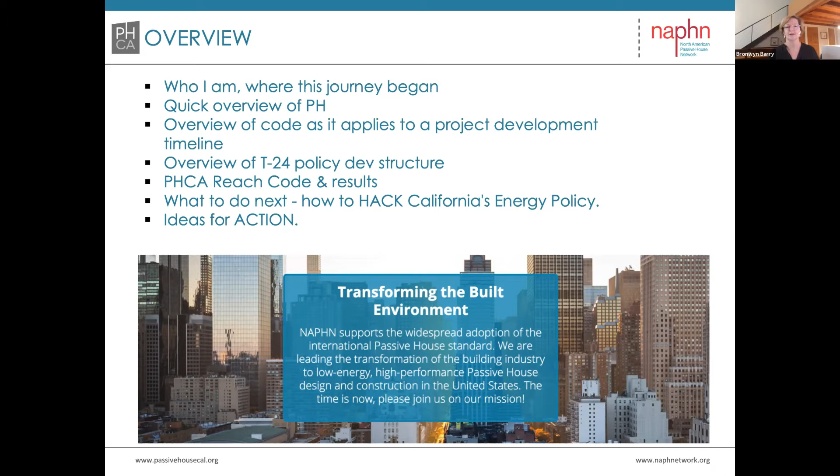A little bit of background here. Really, I came to all of this work as a practitioner. I am an architect, based in San Francisco, and for my entire career I've really been chasing this idea of how to build a reliably comfortable building for my clients. This through various explorations.

I went down a bunch of different rabbit holes in the early 90s looking for the green building pathway, and we tried all sorts of things, looking at straw bale and cob and denim insulation. This was in an era where we really didn't know what a green building was, and we were all collectively trying to define that idea. And this was where I stumbled across Passivhaus.

by going to a presentation in Berkeley by a guy named Nabih Tahan, who had recently returned from living in Austria and renovated his bungalow in Berkeley using this Passivhaus performance model. It really was a big aha, eureka moment for me, because it gave not only the integrated methodology to deliver this reliable comfort, but it actually also had the tools. And as a pretty practical practitioner, I always want tools. So that really struck a chord for me.

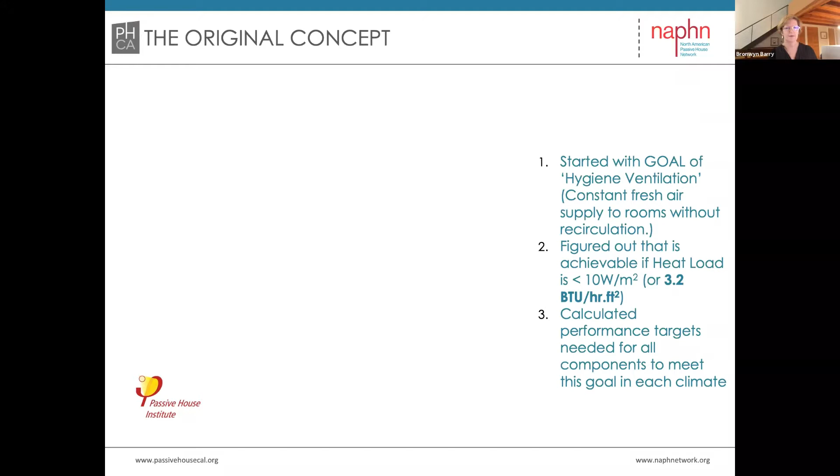So the original concept is super basic, and in our current COVID constrained world it makes so much more sense. It really was based on the idea of how to deliver 100% fresh air into a building without having to recirculate, and then just supply a very little bit of heating and cooling.

And really, that was the main experiment. It was founded by two physicists, which sounds like an idea that physicists would come up with. And then, based on the goal of supplying 100% fresh air ventilation to a building, they looked at what the target had to be, how little heating and cooling would be required to enable that fresh air supply to be possible.

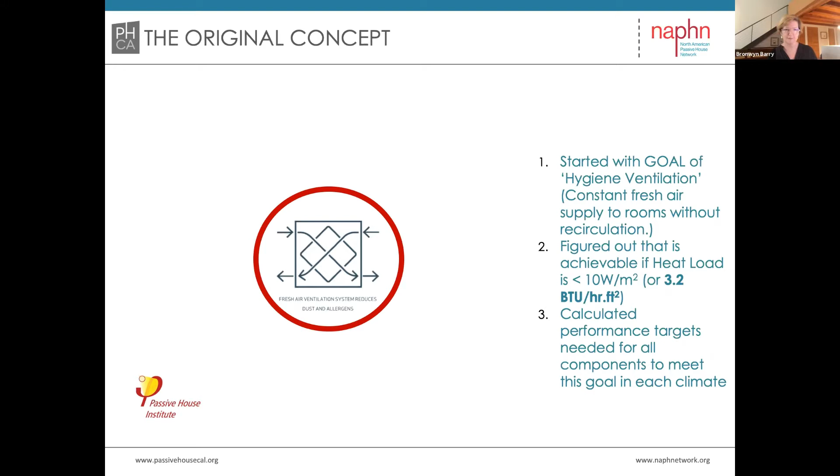And then they literally designed the rest of the building elements around that goal and figured out how to actually achieve that primary target.

So, the baseline really of Passivhaus was they figured out that if you created a building envelope that only needed 3.2 BTUs per hour per square foot as the primary heating load, then you could actually constantly supply it with fresh air.

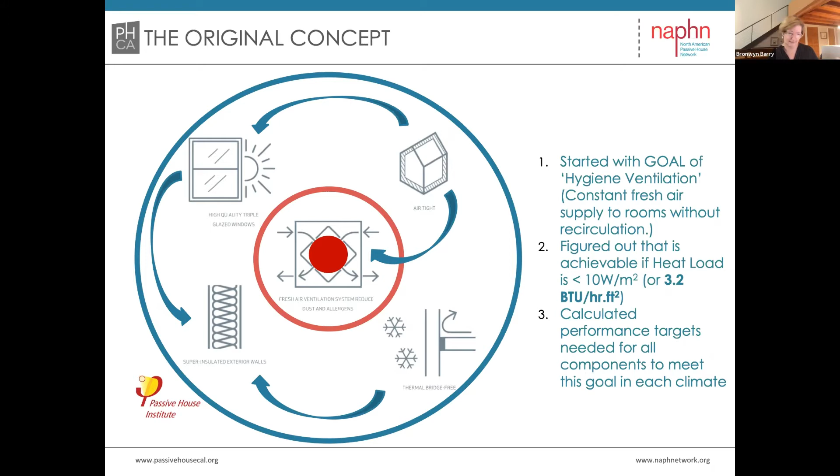And as I say, in the COVID constrained context, this suddenly makes a whole lot of sense, because if you've been reading any of the science coming out about how to minimize COVID spread inside buildings, all the guidance is saying 100% fresh air supply, which is incidentally where this all started.

So, based on that thought experiment and developing the physics around it, the first Passivhaus was built in a place called Kranichstein in Germany. It's just south of Frankfurt, for any of you who've ever been to Germany.

And this is it. It was a fourplex, 4 townhouses. And one of them is owned by the founder of the Passivhaus Institute. He lives in the end one on the far left there.

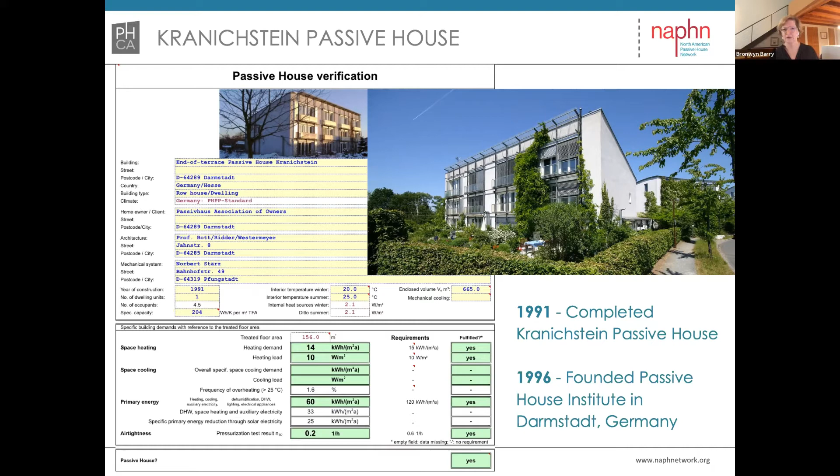And he then founded an institute and developed an energy model that can be used by anybody, including myself, architects, to achieve these targets in your local climate and with whatever building you care to input into the software.

And incidentally, I developed a tool with some smart physicists here in California a while ago that looked at how do you do sensitivity analysis to your energy model to really optimize the targets that you are trying to meet for all of your components of your building. So your windows, your exterior wall assemblies, your roof, your mechanical system, how beneficial air tightness is in your climate, and then a couple of other sort of very specific window

surface area, etc. And I ran that original Kranichstein building's Passivhaus model through this sensitivity analysis package, and lo and behold, found that every single component in that building was optimized to that 10 watts per meter squared, or 3.2 BTU per hour per square foot heat load target. So clearly, very meticulously developed and designed.

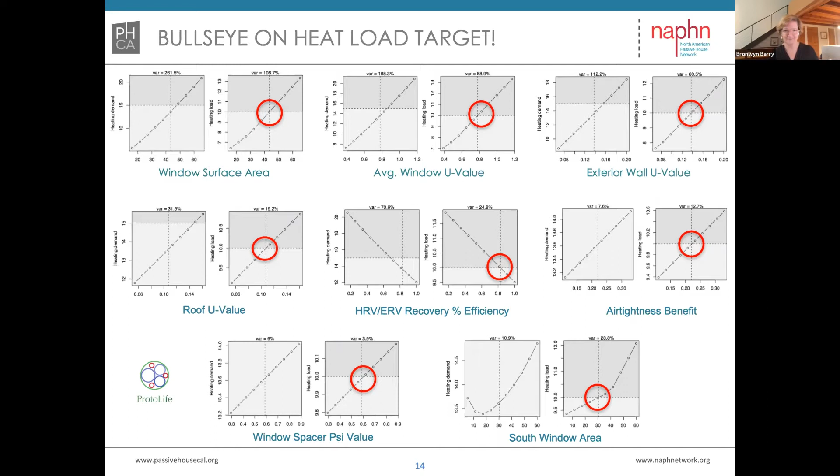So, once with the big picture in mind of what Passivhaus is all about, which was originally the goal to deliver what's commonly now known as hygiene ventilation, which is just basically 100% outside air supply to your building, and then being able to heat and cool that minimally without using too much energy.

These were then extrapolated to become the Passivhaus standard, so you could certify your building, and the primary certification metrics are these.

The peak heat load number of 10 watts per meter squared, which is where that originated. Then they set a heating or cooling demand cutoff point, which helps lower the amount of renewable energy required to heat and cool a building.

There's an air tightness number, which is really important for not only maintaining the efficiency of your ventilation system, but also has some real durability benefits with moisture transfer through walls, and really just containing your indoor air quality within the building envelope, so you can effectively filter and exchange air without having random air leaks within your envelope.

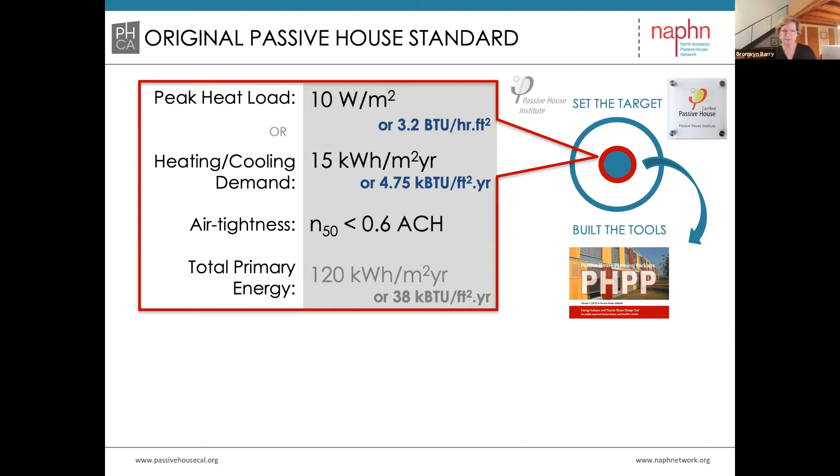And that has all been supported by, as I mentioned earlier, providing a tool that enables anybody to input their building into this model, and then change and adjust the design to ensure that you would meet these certification targets. So it's effectively a really great design tool, which is what I've really come to appreciate about it.

And then they also developed some trainings around the software and the protocols and methodologies to actually achieve these targets. So it's a really well structured process where you get trained, you get the tools, and then you know how to meet the targets clearly. So actually implementing something that could be quite challenging has a support structure for implementation.

And then, as with anything good, it evolves over time. The original standard, this total primary energy target, in 2015 was actually completely overhauled, because our world has really changed quite dramatically since the early 90s, when this standard was first developed, and carbon emissions and our climate change challenge has become one of the biggest imperatives of our time.

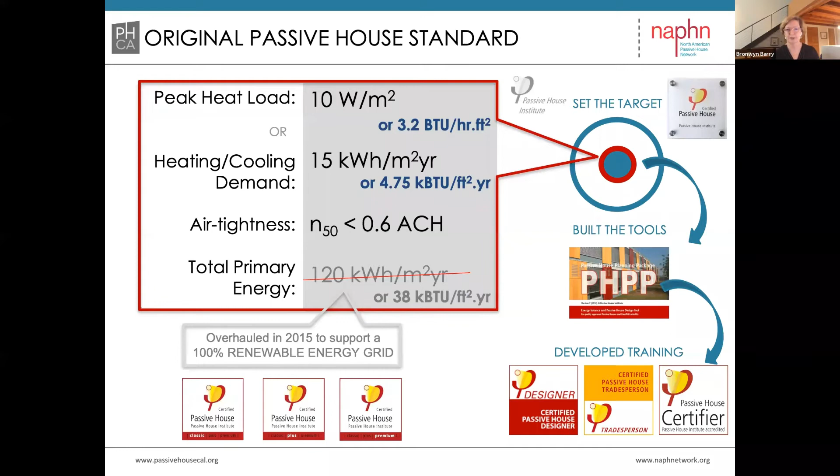And as I say, the 3 classes are really a function of reduced demand over increased generation, so they're a sliding scale as opposed to a fixed target. The classic is the basic passive house.

That can have some renewable, but it needs a specific amount of renewable to get to the second tier class, which is the plus energy. And the third tier class is the premium energy, which is maximized demand reduction and maximized renewable energy generation.

And of course, the plus is sort of an improved variant of the premium and the classic. But needless to say, the basic premise of Passivhaus remains, which is drive demand down to the lowest possible point to make it economically feasible, then optimize the amount of renewable energy that is supplied, and reduce any non-renewable energy demand.

So it doesn't say you can't use a fossil fuel, but it heavily disincentivizes them, and basically penalizes the fossil fuel supply grid. And then it gives you some options for green roofs and shaded roofs.

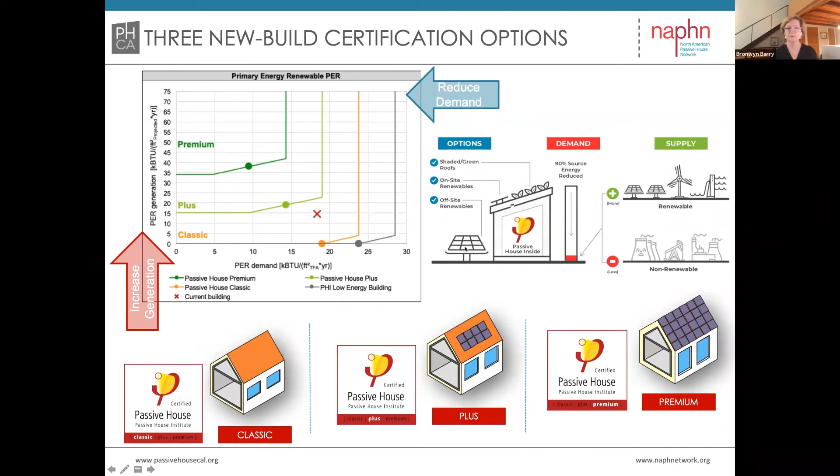So it also has a framework for retrofits, because as everybody who works in the building industry knows, most of the carbon emissions from buildings are coming from what's already existent.

Being able to create a framework that allows for existing buildings to also be upgraded and meet these same rigorous energy targets is important. The metrics are slightly more relaxed for retrofits, because everybody understands that retrofits are a lot more challenging.

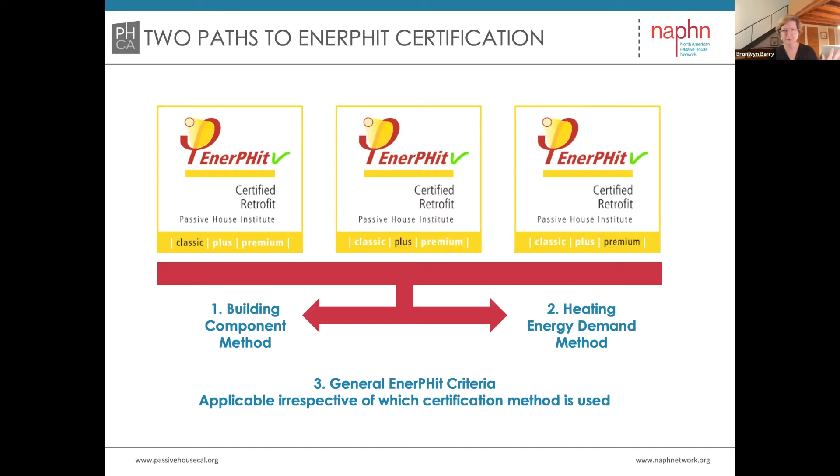You're dealing with a lot more constraints that you don't have so much with new construction. The retrofit process can also be done in a phased way, so the economics aren't as challenging, because sometimes you just don't have all the money up front. Being able to do them in a mapped out version with a plan, knowing when you can afford to do each upgrade and still meet the end goal, is important. There's a couple of different methods, pathways to do that.

Passivhaus is also a global standard. It applies to all the different climate zones across the globe. In California, Passive House California has had all 16 of our different climate zones modeled with the climate data set for all 16 climate zones here in California.

Essentially, you simply adjust the design of your building to meet the targets specific for your climate zone. So obviously, a colder climate zone like Tahoe, you would need slightly thicker walls, a little bit more insulation, and perhaps definitely triple pane windows.

Whereas in San Diego, you might actually not need any insulation in your foundation, because you want the cooling benefit of being ground coupled, and you definitely don't need triple pane windows in San Diego. So as I say, it's design adjustable to your local climate zone.

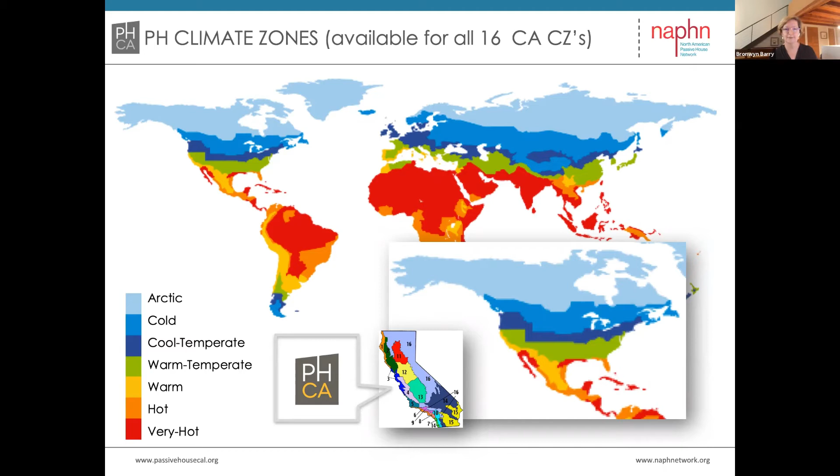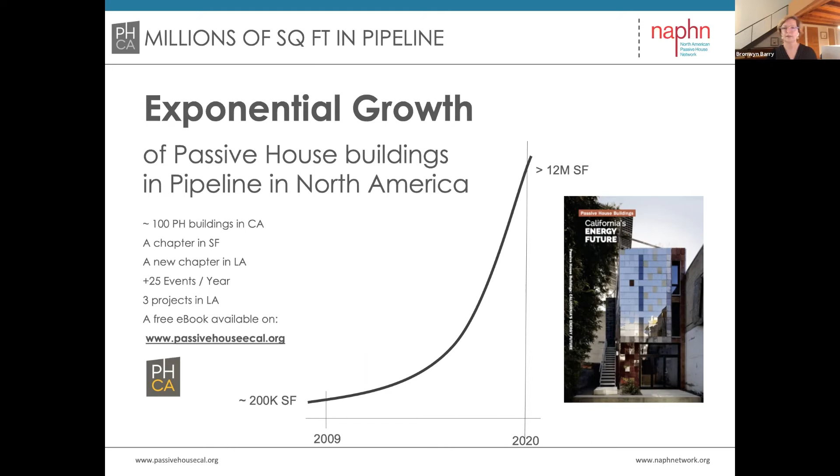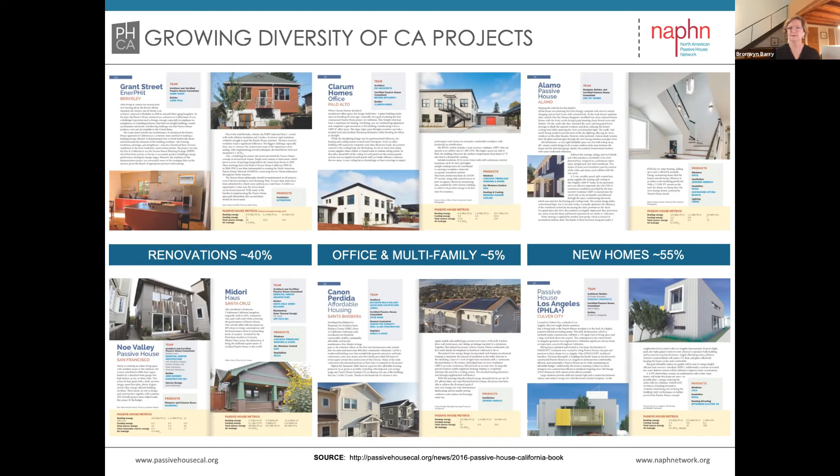But we've actually found that California has slowed down a little bit compared to the uptake in other regions. This is where I'm showing you some projects that we also have on our database all around California. For the most part, the uptake has been in single-family residential buildings.

This is also the space that I've been working in. As an organization, as Passive House California, we sat down and looked at why California has been slower to pick up on Passivhaus than many other regions around not only North America, but definitely the globe, because California has historically been leaders and innovators, and our climate policy has also historically been very well regarded.

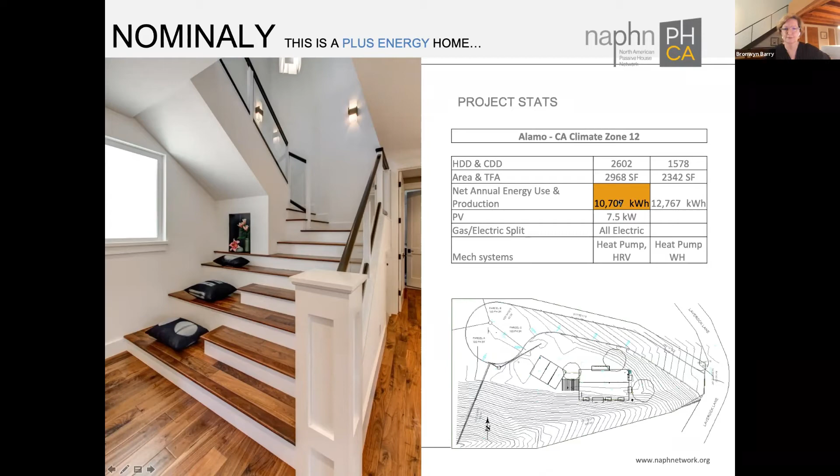But when I started to look at what was required by code - this was the 2016 code - the code required my roof to be an R38. My Passive House model, I built it at R46. It could have been just a little bit less, but we filled up the entire roof cavity, and effectively the R value is 46. My walls code at the time required R19, and we built them at R28.

My windows are much better than the code requirement, and we insulated our slab, whereas the code does not require that slabs be insulated. The code also assumes an air tightness of 3 air changes per hour, but does not require that it be tested. That is a very wishful thinking requirement, as far as I'm concerned.

We tested the air tightness of this building. It came in at 0.3 air changes per hour. Just to put that in context, the Passive House standard requires that your building meet 0.6 air changes per hour. An average building tested in California ranges between about 12 air changes per hour, and some get down to 3 or 4, but generally, 0.3 is considered incredibly air sealed with a tightly built envelope.

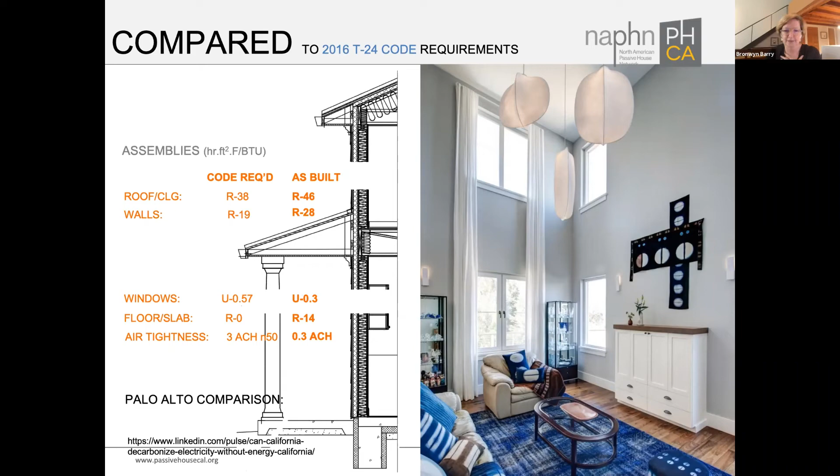And of course, we included a mechanical ventilation system with heat recovery. With this 7.5 kilowatt array on the south facing roof, and this owner also has an electric vehicle, the house used just under 10,000 kilowatt hours per year. They used some for the car, and we had a net positive surplus after the PV production. For those who understand energy use intensity, the EUI for this building is about 9.5, which is within the Architecture 2030 target range for a single family home.

But what I found is that the idea of this net positive, or even net zero house, became really problematic once we started to look at this building.

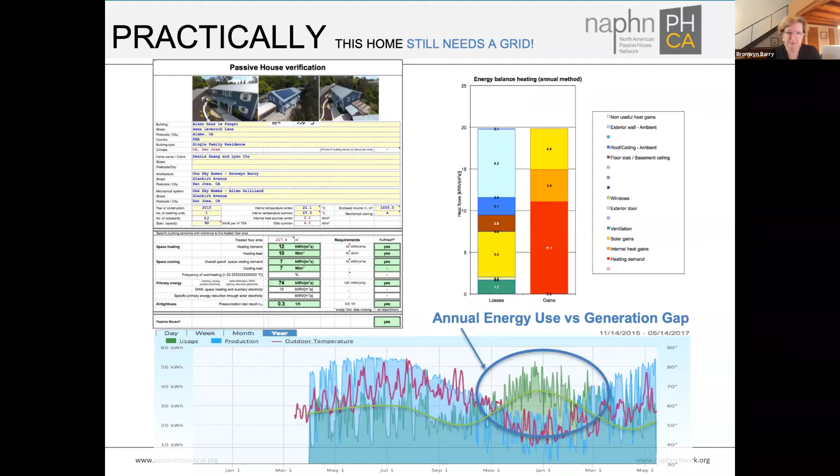Just to demonstrate, this is another house that I built more recently and did the same monitoring, because once you start monitoring your projects, you really get to know exactly how effective your strategies and your energy model are working. This house is an incredibly efficient home.

The green line is the total energy consumption, including the electric vehicle. The owners have one electric vehicle they charge off of this solar array, on the backside of this house. This is their solar production.

You can see again in the winter, and interestingly, there's a small dip because of our summer fog in the solar production that happens in the July-August months, where it doesn't quite supply all the demand even.

Through PG&E I found that all the homes in this neighborhood were built to the exact same model with slight variations, essentially all the sort of 2-bed, 1-bath, 1-garage bungalow cottage. I aggregated all of those and showed this is the average energy consumption for a similar home in the same zip code.

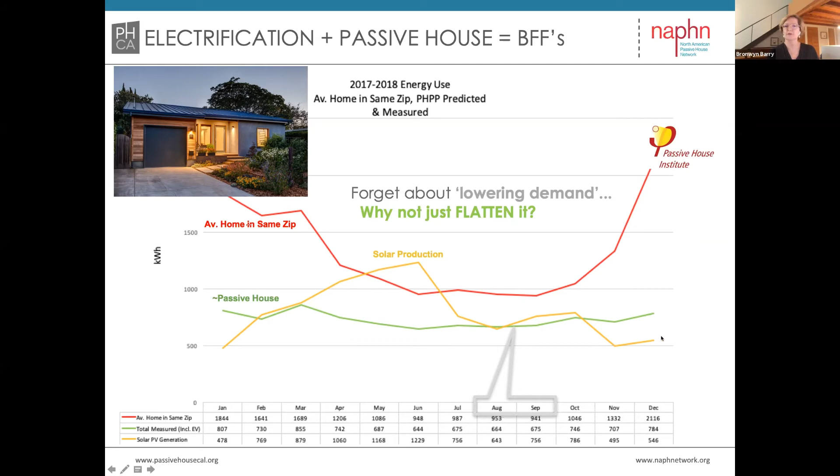Back again to where I was starting to see big disconnects between what I was trying to do with Passivhaus and what our Title-24 energy model was pushing us to do, which started to become really apparent. So this project, this was my Passivhaus metrics and model, and these were the results that my energy model told me I was achieving.

Then my Title-24 energy model — these were results it was very difficult to actually put onto this graph in a meaningful way, because what Title-24 does is it doesn't give you absolute targets for your building. It compares your building to a baseline building, and then you get told my building was 57.5% better than this mythical baseline building, which incidentally is not anywhere close to what my design looks like.

And that was for space heating. I was 23.9% better for space cooling. I had some IAQ ventilation numbers that it said I was 0% on.

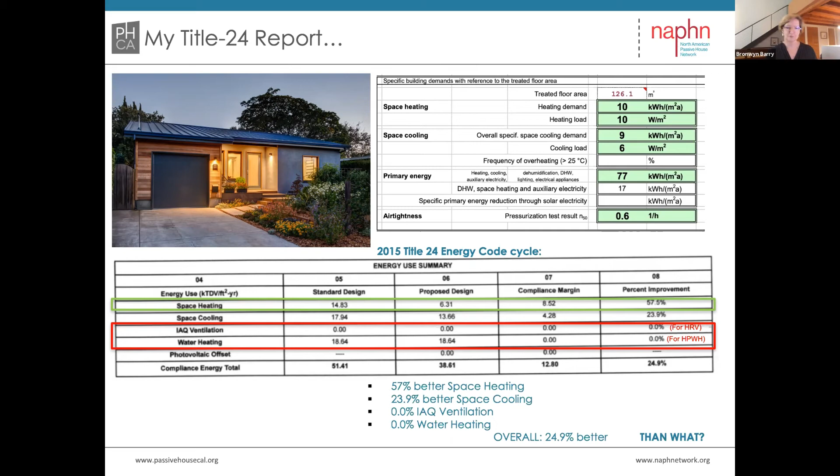But I still also say we have a lot more room to improve, and our Title 24 energy model is still only just the best, the lowest performance building that is legal. So this was sort of where we went to.

This motivated a bunch of us working in Passivhaus in California to dig a lot deeper into policy and how Title 24 is developed, and get involved in that process a little bit more to see how we could help use the information we had gained from building passive houses in California, since many of us have been doing this since 2007, and help influence code in a good way. And that journey upstream in the policy process has been really fascinating.

So this is where the hack part comes in, because what we found as we started to engage with the code development process was there are good overlaps between Passivhaus and how Title 24 code evolves. We could intervene to some degree and comment and provide input and feedback to the code development process. But there were also things that really were completely outside of the code framework, and haven't started to be addressed in a real integrated, holistic way. So I created this slide to give a very graphic overview.

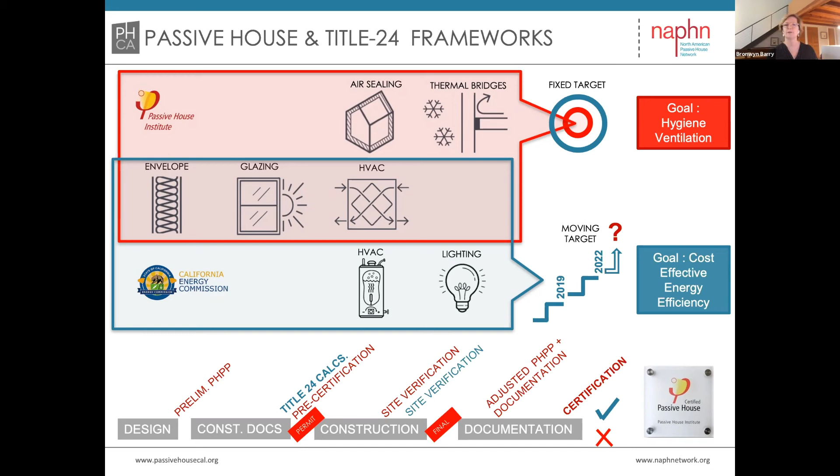So if we go back to where we need to go in California to actually allow for this holistic, upstream design thinking to be integrated into our building process—that's kind of what I wanted to bring and share with you today.

California has some fantastic high-level policy, and our buildings are now being required to meet a carbon emissions target rather than a simple energy use target. But the transparency of what that actually means for the user, the practitioner like myself, has been very challenging to uncover.

I pride myself on being a little more familiar with this process than most architects. I think I'm still kind of the anomaly in the design world, being a lot more connected with the energy, design, and carbon emissions for my projects. It's just because I'm curious about that—no aspersions on other architects, there's plenty of things they're still required to manage—but we should be making this easy.

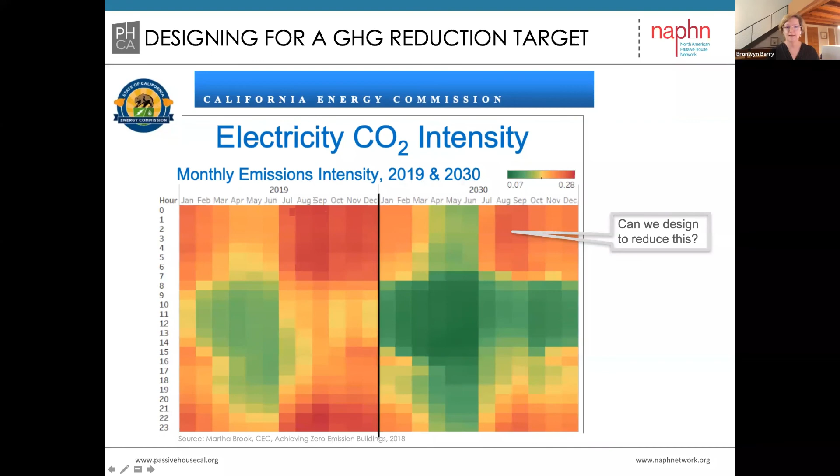I'm running probably a little bit over time here, but I've got a few more slides left.

Really, what we found—we did a proposed REACH code at Passivhaus California, and we looked at, okay, if we did integrate Passivhaus into California's energy code, where would we start?

What we did was start with low-rise multifamily buildings, not because we were all familiar practitioners in that building type—as I showed earlier, most of us worked primarily in the residential single-family home arena—but because we saw that low-rise multifamily buildings were much easier to make really energy efficient and cost-effectively built to Passivhaus.

So we started with that building type and generated a REACH code for Santa Monica, where we modeled a standard low-rise multifamily building in all 16 climate zones in California.

And the results of the study were remarkable. What we found, and what was confirmed by the CASE organization that vets the REACH code and verifies that it can be adopted, showed that a passive house model, all-electric, was leaps and bounds more efficient than the REACH code target required for 2019, and in some cases 700% better, which just completely blew my mind.

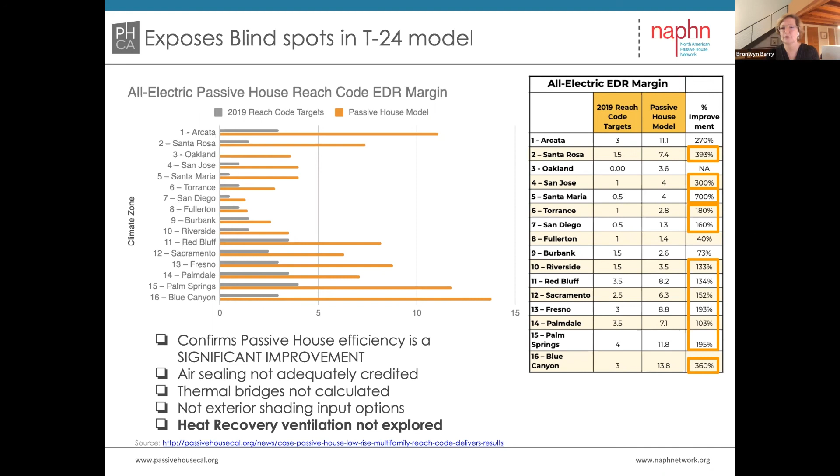I've got two more slides, but I also wanted to show that in California, we've been really good at developing smart tech. All of you understand how the integration of multiple components into one optimized, simplified system has really exploded how California's tech industry has developed, and we are still global leaders in this arena.

Yet the construction industry—I've kind of become well known for moaning that I say we are still currently in a third world product market for construction industry equipment.

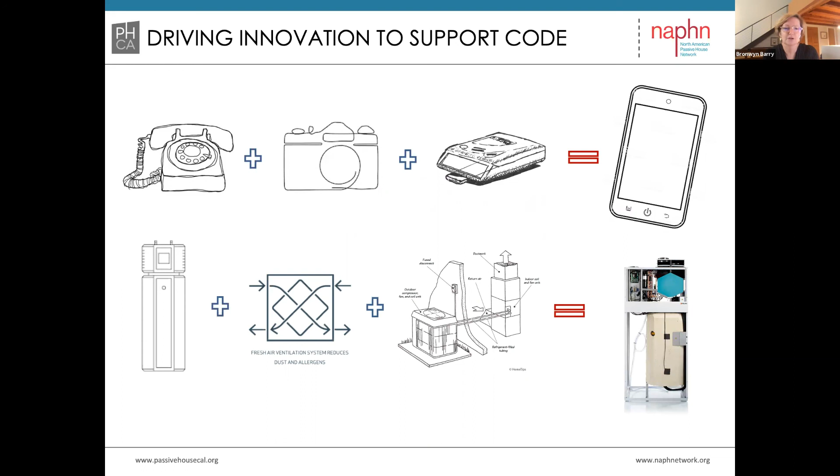And so these are my wish list for you as hackers in this space. If you're not going to be helping hack policy, what we really need to be also doing is starting to hack construction equipment, and there's huge opportunity for this to happen here in California.

This is equipment that I see when I travel elsewhere. The Chinese were building these amazing integrated boxes where I can have my hot water heating, my heat recovery ventilation system, and my heating and cooling all integrated into one really simple package.

I desperately need this for my apartment here in San Francisco. I want ventilation and I want a heat pump for heating and cooling, but I'm really much more interested in that fresh air supply. And I simply can't access this equipment.

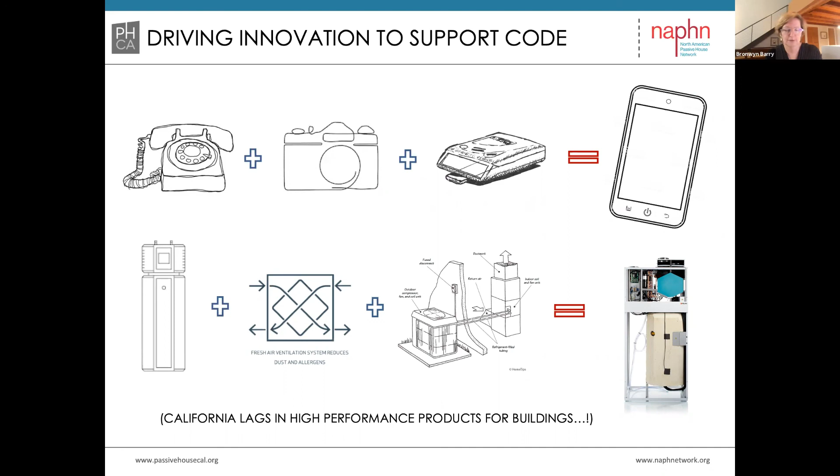So as a hackathon opportunity, if you're not interested in policy, get into the making of this integrated equipment. It's a huge gap in our market. I would love you guys to see how to engage and deliver this equipment, which has really become ubiquitous throughout the passive house world, except here in the US.

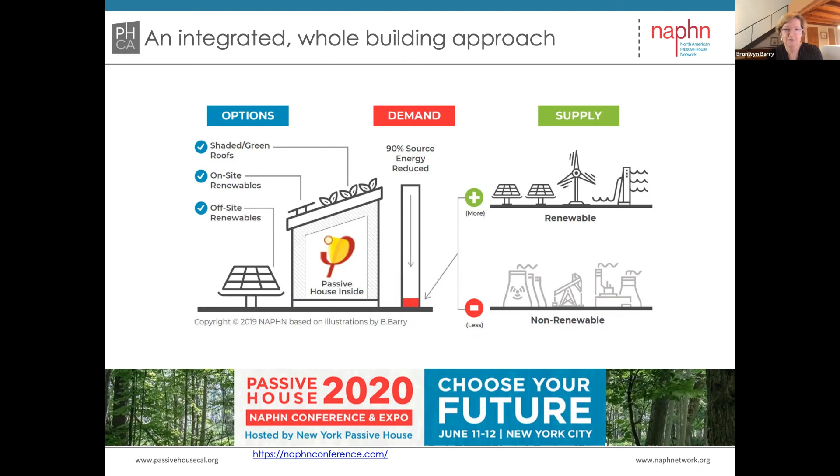So closing, thank you so much for inviting me, Damon, and the AEC Hackathon community. It's really fun to engage with you. Let's look at how to accelerate the design of integrated whole building approach systems that accelerate the adoption and integration of renewable energy supply.

And so my last slide—if there's anything you guys can hack, please go for a performance-based code with a very specific target, so none of this 'percentage better than' nonsense. Use an integrated performance model. I don't care if it's not passive house, I do care that it works.

And again, let's look for and accelerate the development of HVAC equipment that shares resources, the same way our smartphones do. So that's it.